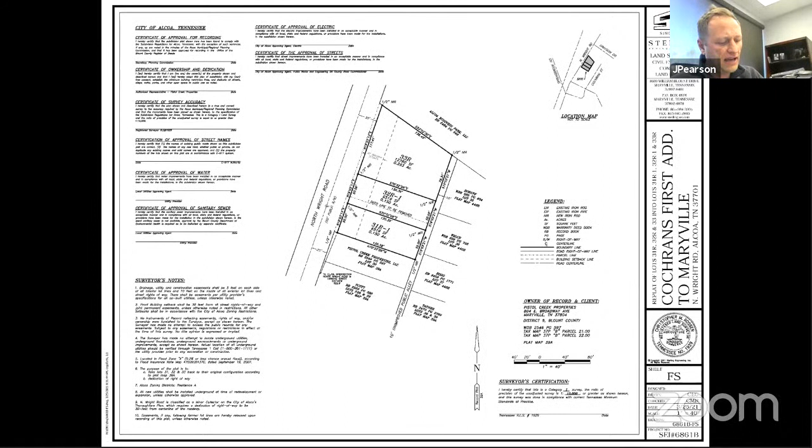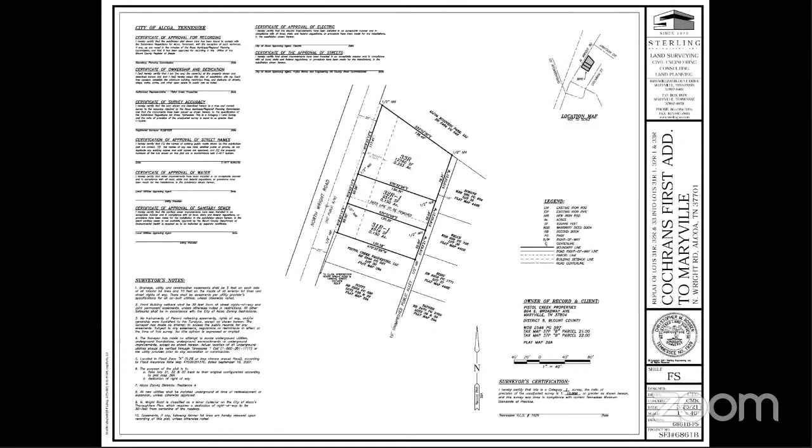So there will be an item on the agenda to allow that per a zoning change. In this case, right of way from center line is maintained as 30 feet from center line for a collector roadway facility. Staff does recommend approval of the preliminary and final plat, subject to the following stipulations: 1, a revised plat denoting stipulation A1. 2, approval by the Alcoa Board of Commissioners for the rezoning to Residence District B. 3, approval by engineering, noting this plat is still under review for utilities. 4, approval of utilities. 5, execution of the necessary signatures and recording of the plat. 6, meeting all other city requirements.

Okay, thank you. You've heard the recommendation by staff. What's the desire of the commission? I move we approve it. Second. I have a motion and a second. Is there any discussion or any comments? If not, call the roll, please. Commissioner Thompson, aye. Commissioner Johnson, aye. Commissioner Rochelle, aye. Chairman Williams, aye, thank you. Motion carries.

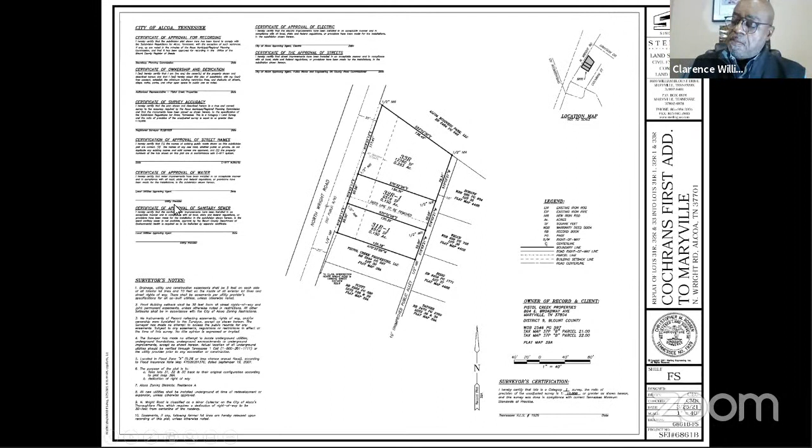Next we have a consideration of request by Benny Marmon of Benchmark Associates, Inc. to combine 2 lots into 1 lot, Topside OZ II LLC property, 2139 Topside Road, tax ID 017 031.00 and 031.01, project plat number 20-052.

There are a couple of things being denoted on this plat. First, there's a 40-foot landscape buffer that will be platted along the road frontage in conformance with a BZA approval for a special exception for a multifamily project, allowing for separation between the highway and residential dwellings. There's also a 25-foot buffer established adjoining the Hutchinson property, which is agricultural, lower density residential zoning. Since this property is zoned General Business District E, that buffer will provide for landscape plantings to lessen impacts on the adjoining property.

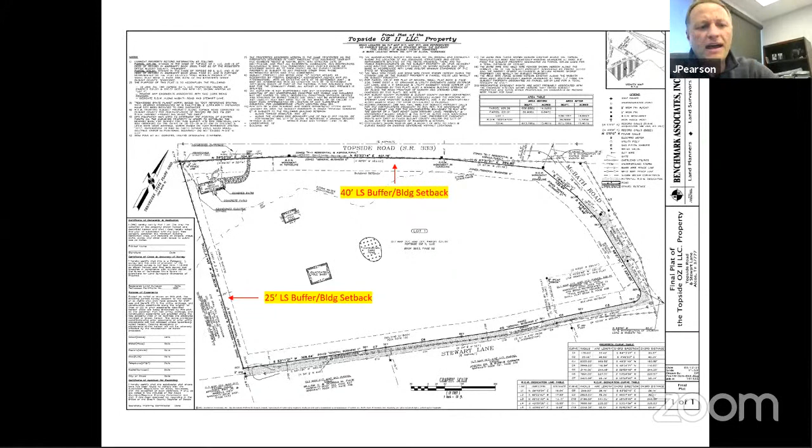Shown here is a blow-up of the buffers. One thing I want to point out on this property is there are right-of-way dedications being precipitated by this plat, and also as a result of road improvements.

McBath Road is a collector roadway facility requiring 30 feet from center line, shown here in the hatching. Stewart Lane provides for 25 feet from center line, a reduction of 5 feet from McBath Road, since it's a local street on the road plan requiring only 25 feet from center line. Topside Road is a collector, or minor arterial, requiring at its most 50 feet from center line, for a total of 100 feet. In certain instances, you can go down to 40 feet from center line.

I want to talk about that. First, in the case of the former recording in McBath, in talking with the surveyor today, Benny Mormon, who's on this meeting call as well, at the time of that recording there was a dedication of right-of-way of 30 feet from center line provided, and it was shown and recorded that way. The plat that Benny has presented does not show the 30 feet from center line that was previously platted and recorded.

One of the comments is that the previous plat and right-of-way dedication from center line be shown to indicate the 30 feet, with the intent being that we would go back at a later date and do an abandonment of 5 feet along Stewart Lane, because again, it is now a local street, whereas at the time of the previous plat it was a collector roadway, which required the 30 feet from center line.

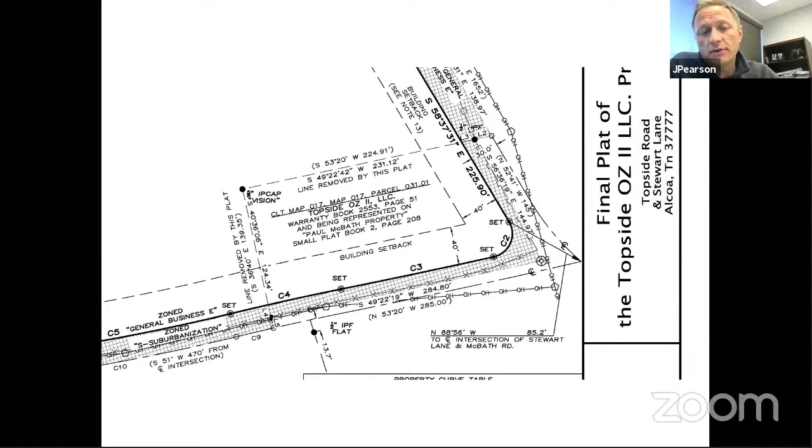The actual information shown in terms of the property calls and the location of that plat per the Paul McBath property, that's all accurate. So what I've recommended, and when I go through the stipulation of approval, is that in all areas concerning this former plat, that be reviewed further in tandem with the city attorney. It may be that a plat note needs to be added so that the previous plat is not lost in terms of what actually happened there, recognizing that there was an error and that this plat is accurately reflecting the center line measurements in the 25 feet right-of-way dedication. So I wanted to point that out.

In another matter, as I mentioned, 50 feet from center line is required for the minor arterial along Topside Road, and one of the stipulations of approval was that 50 feet be identified from center line. This is the fringe of the urban growth territory of the city, this property, and there is an ability to go down to 40 feet from center line.

The owner, Jim Doss, actually owns the property also opposite the street, and it has been requested of staff that consideration be made to reduce that 50 feet from center line to allow that which is already in existence. It is a state road right-of-way. There is 50 plus feet here on the property, and it starts to actually narrow to as little as 44 feet 6 inches at this point of the property, so you're not getting that full 50 feet.

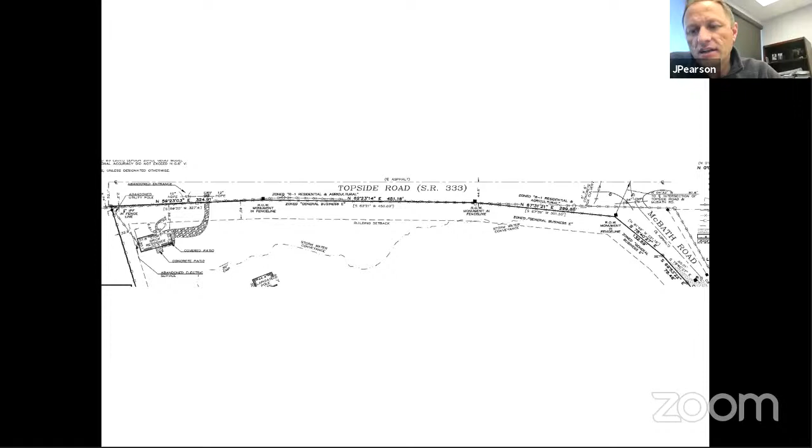If this property were near the Parkway interchange, where Weigel's, Good Times, the bank, and the Wine and Spirits are, obviously in that area the road improvements are more significant, but they do narrow as you travel the corridor. Even in the future, we would expect that to not change. So again, we feel comfortable with that.

So that's just an update from your packet on this. We went through all of this, so I will go ahead with the recommendation, as we talked more at length on it during the briefing.

Staff does recommend approval of the preliminary and final plat, subject to the following stipulations. One: a revised plat denoting stipulations A through G as revised, as you received in the revised packet. With the revision I just spoke about, I'm going to point those out as they're being written into the recommendation from the revisions that you've received also.

So the first revision would be D, item 1D, which states that Stewart Lane is classified as a residential local street on the City of Alcoa's thoroughfare plan, which requires the dedication of right-of-way to be 25 feet from center line of the roadway, with 30 feet from center line dedicated along a portion of Stewart Lane per plat book 2, page 208, McBath, Paul, the original subdivision plat. The addition here is a note that the city attorney is to review and approve language modifications to this note if necessary, which may include the need for a separate note, as the surveyor's claim is that the previous plat recording included inaccurate center line locations.

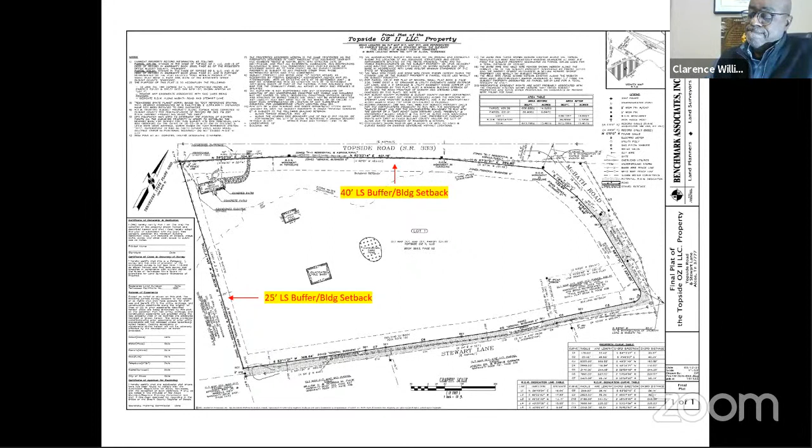Move approval as noted. Second. Okay, we have a motion and a second. Is there any discussion?

If not, call the roll, please. Commissioner Rochelle, aye. Commissioner Johnson, aye. Commissioner Thompson, aye. And Chairman Williams, aye. Thank you, motion carries.

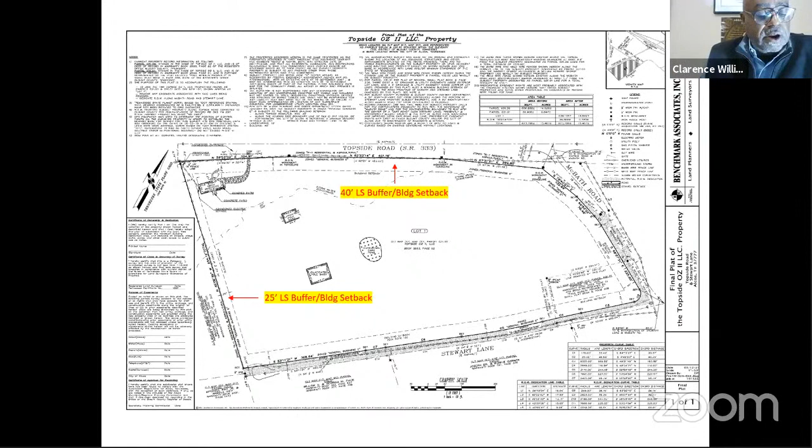Next, we have a consideration request by Kelly Harbin, D&S Builders, to plat a utility easement and site improvements, Fairfield Inn property, Springbrook Farm Development, 1865 Collins Street, tax ID 036K A006.00, project plat 19-058.

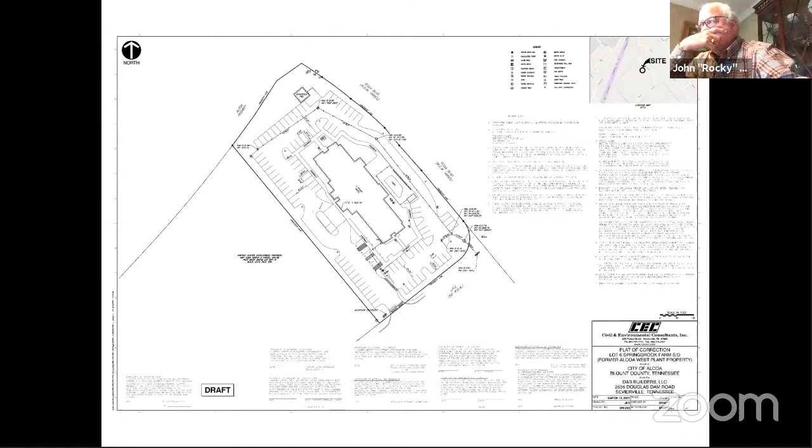Staff recommends approval of the preliminary and final plat subject to stipulations: 1, a revised plat denoting stipulations A through N as revised, provided to you previously in the packet. Revisions relating to the need for property owner information for the joint access easement, held within a separate lot for common open space and vehicular and pedestrian access, as well as N, which included that the actual lot numbers be provided on the actual plat map for that lot.

2, approval by engineering — note this is under review for utilities. 3, approval of utilities. 4, execution of the necessary signatures and recording of the plat. And 5, meeting all other city requirements.

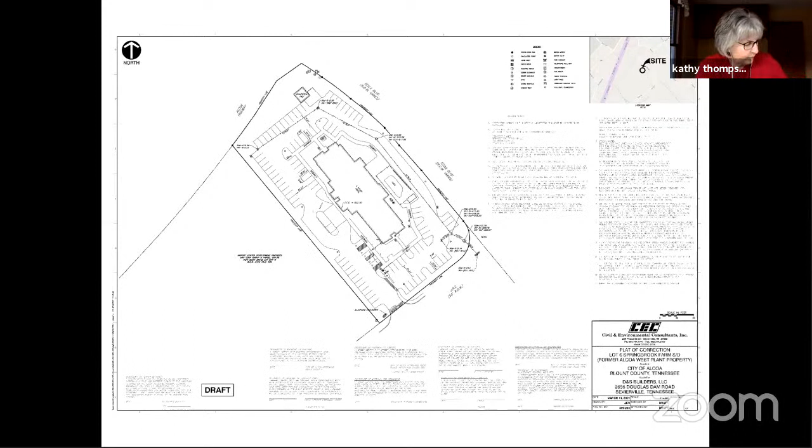Okay, thank you, sir. You've heard the recommendation by staff. What is your desire? I move we approve it. Second. We have a motion and a second. Is there any discussion? If not, call the roll, please.

Commissioner Thompson, aye. Commissioner Rochelle, aye. Commissioner Johnson, aye. And Chairman Williams, aye. Thank you.

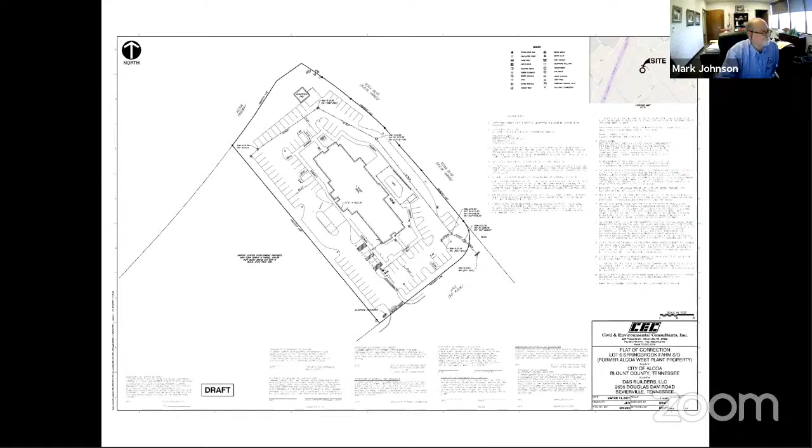Next, we have consideration of a request by Gary Best to replat the interior property line between two lots, Harold Best Estate property, 1556 and 1606 Middle Settlements Road, tax ID 045, 054.00 and 054.02, property plat 21-012.

Here's the property along Middle Settlements Road. It has frontage here, with a portion in between this land and Gary Best's property as it exists. There was also a previously platted area as part of this estate, which created Lot 1. What's happening is, as part of the estate, the portion of the property which includes the home is being split out from the larger land holding, with that larger land holding then being absorbed into Gary Best's property, as this is his family's estate.

There is a flood hazard area on the property, shown here with the hashing. There are also blue line streams on the property. All improvements are being shown. Right-of-way dedications from centerline of 50 feet, as Middle Settlements Road is a minor arterial roadway. The 50 feet is being provided from centerline at Gary Best's property, and needs to also be reflected on the property identified as Lot 2. As the previous estate split to carve out this lot created Lot 1, Lots 2 and 3 are being created as they were part of the original Harold Best estate.

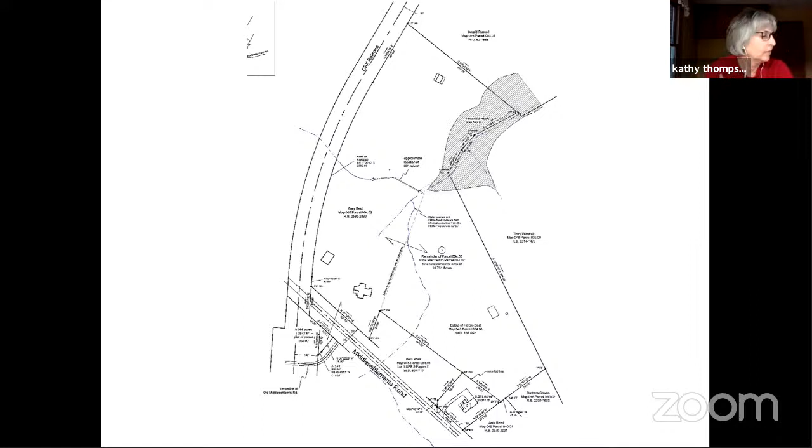Okay, thank you. We've heard the recommendation of staff. What's the desire of the commission? I move that we approve this. Second. We have a motion and a second. Is there any discussion or comments? If not, call the roll, please.

Commissioner Thompson, aye. Commissioner Johnson, aye. Commissioner Rochelle, aye. And Chairman Williams, aye. Thank you. Motion carries.

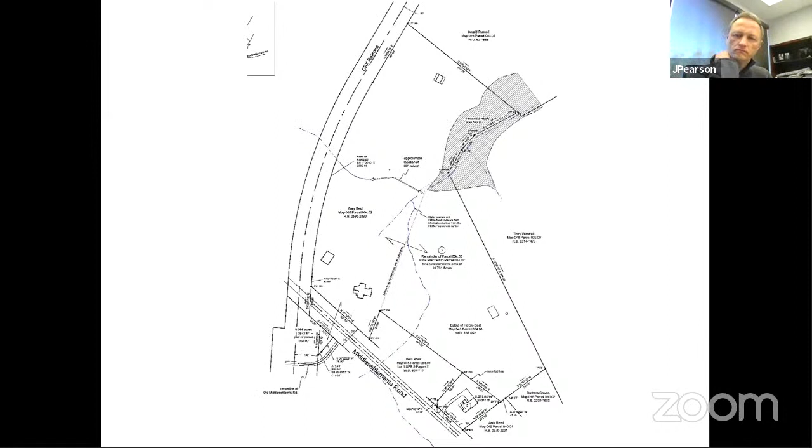Next, we have a consideration request by Randall White Land Surveys to replat 3 lots into 1 lot, Trevor Hill Properties, Fox Hill Drive, Two Rivers Lane, Urban Growth Boundary, tax ID 0020, A 006.00-009.00, project plat 21-013.

As you can see here, the plat is in the urban growth territory of the city, creating this lot, which is Lot 10 — a land area absorbing 2 additional tracts. There are also some easements that are being abandoned.

Staff recommends approval. You were provided the recommendation in your packet, and no changes were made to that. Staff recommends approval of this preliminary and final plat, which is again within the growth territory of the city and located off Fox Hills. Stipulations: 1, a revised plat denoting stipulations A through E; 2, approval by engineering if applicable; 3, approval of utilities; 4, approval by Blount County Environmental Health; 5, approval by Blount County Highway Superintendent; 6, execution of the necessary signatures and recording of the plat; and 7, meeting all other city requirements. Move approval as noted.

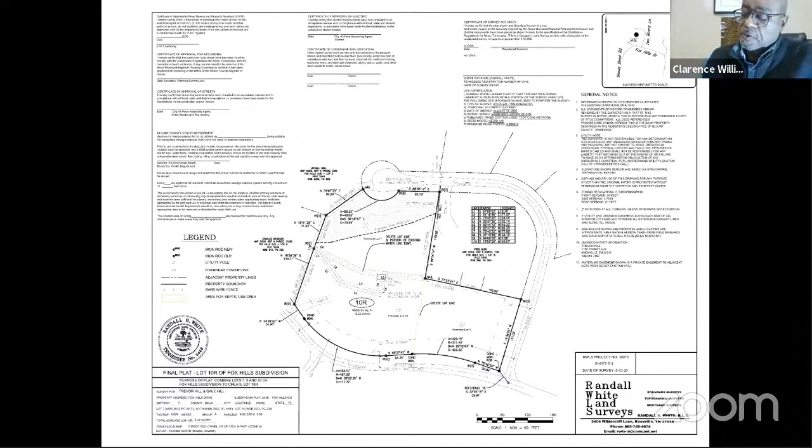We have a motion and a second. Is there any discussion? If not, call the roll, please. Commissioner Rochelle, aye. Commissioner Johnson, aye.

Commissioner Thompson, aye. Chairman Williams, aye. Thank you. Next, we have a consideration request by Ruskin Baskin Land Development Solutions to replat the interior property line between 2 lots, Young Properties, 516 and 518 Russell Road, Urban Growth Boundary, Tax ID 027B A of 010.01 through 011.01, Project Plat 21-014.

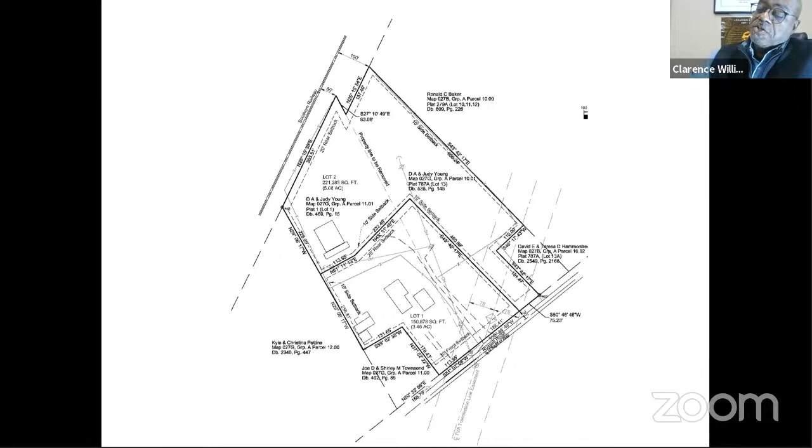Okay, thank you. You've heard the discussion and recommendation by staff. What is the desire of the commission? Move for approval. Second it. We have a motion and a second. Is there any discussion or comments? If not, call the roll, please.

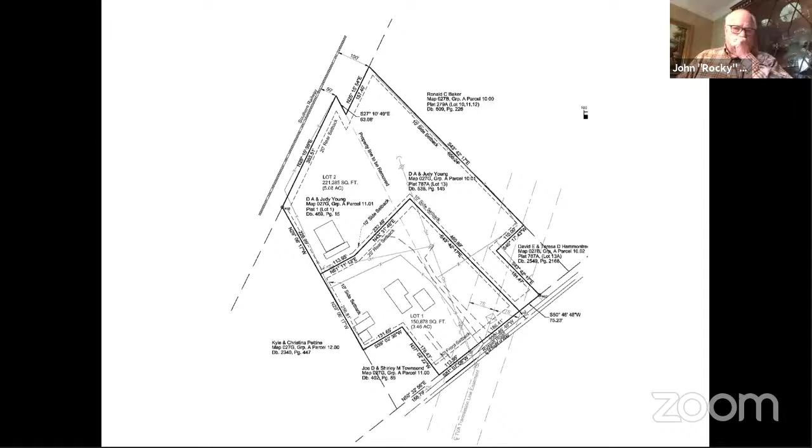Whitaker Properties LLC and Outlander Group LLC properties, 3234 and 3262 Airport Highway, Tax ID 017 084.01 and 084.02, Project Plat 21-015.

This property, along Alcoa Highway with road frontage, also adjoins the Sherwood Garden Cemetery and the North Park area to the north, adjoining the lands.

This represents a split of what I'll refer to as the former Enterprise Building, currently platted as a narrow lot with a property pin here. You can see from the northern corner, south along the highway to this point, it continues to another pin as it closes at its rear point, and back to another pin to close it at the north corner.

So you can see it's limited in its developability. It has limited parking. What this does is give them additional land area to better use this site for a general business district lot that would allow for more storage and such.

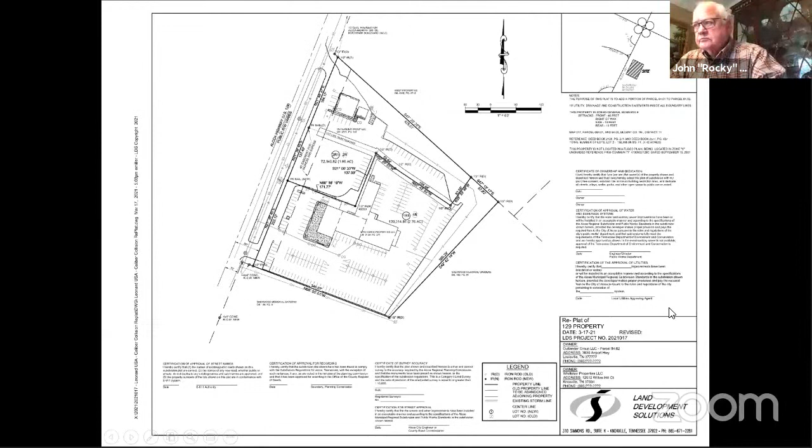On your agenda, under this particular category, request for preliminary and final approval, you show there are 8 items listed. That 8th item we're going to move down to the next category, request for preliminary approval. So there were only 7 items discussed under the previous category. The 8th item will be moved, and that item becomes number 1 under Roman numeral 6.

It is a consideration request by Randa White, C2RL Engineering, to replat 15 lots into 3 lots, replat a portion of Airline Drive to include absorbing a to-be-abandoned area of Airline Drive right-of-way. Honda Land LLC and Loan Properties, Airline Drive and Airport Highway, tax ID 017LB 001.00, 004.00, 005.00, 006.00, 009.00, and 013.00 through 015.00, tax ID 017 078.00, and tax ID 017 078.02, project plat 21-016.

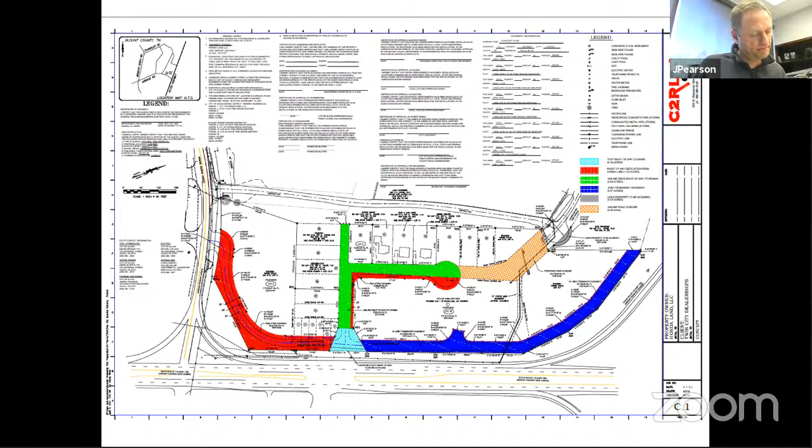Commissioner Rochelle, aye. Commissioner Thompson, aye. Commissioner Johnson, aye. Chairman Williams, aye. Thank you. This item for preliminary approval, the first item in this category, is approved by this body.

Thank you. Next, we have a request for final approval. We have no items in that category. Next, we have Roman numeral 8.

The first item of that category is a miscellaneous request for required action. The first item there is consideration of a rezoning request, Residence District A to Residence District B, for tax ID 037P, B021-00, 022.00, 022.01, 026.00, 026.01, and 026.02, located at 512, 518, 524, 556, 560, and 568 North Wright Road.

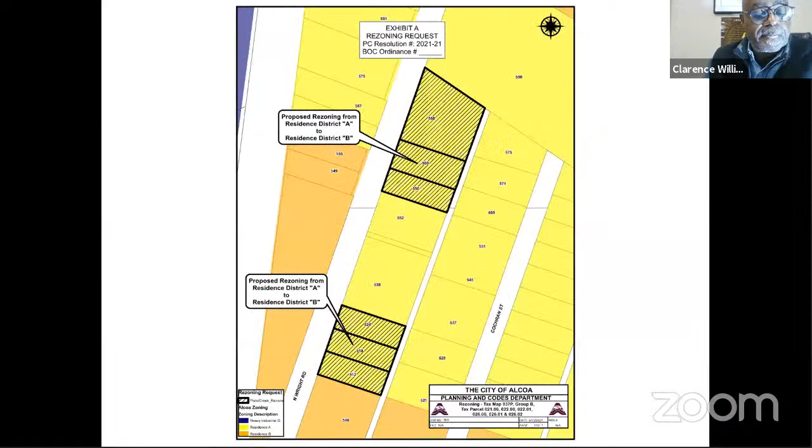Okay, you should see the map before you. You see the hashing. There are 3 parcels on the north end, and on the south end, there are another set of 3 parcels, all held by Pistol Creek Properties.

Again, the 3 northern parcels are part of the plat that was looked at previously and approved. This is just to align the form with the zoning. It's obviously more of a medium density form in this area. The long range plan for the area calls for medium density, and this would be in conformance with that.

So the Residence District B zoning classification is recommended to you, and staff has provided a PC resolution in your packet, PC Resolution 2021-21, which recommends the rezoning to the Alcoa Board of Commissioners, including the approval and recording of a subdivision plat to adjust the lot lines for conformance with the Residence District B zone. So that plat will be held until the zoning is effective, and then it will be recorded.

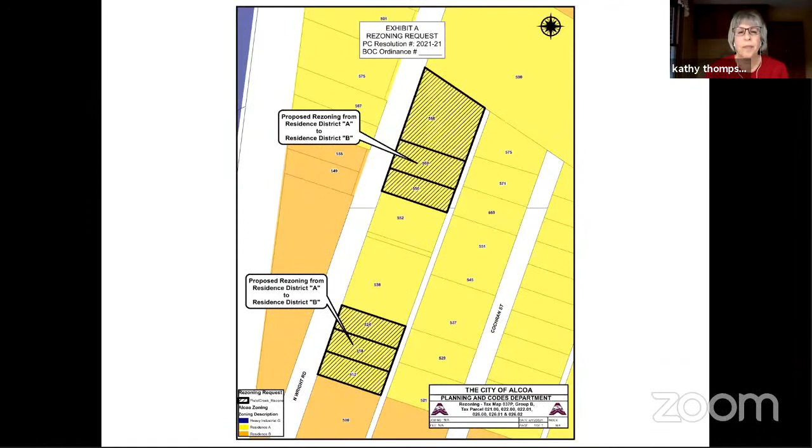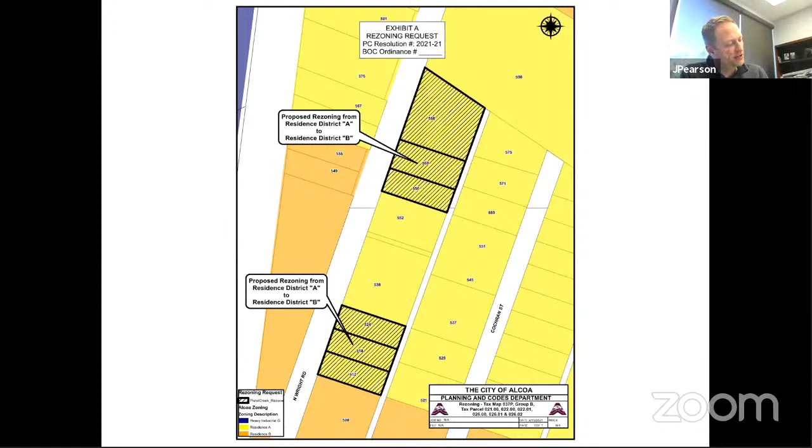Okay, thank you. You've heard the recommendation by the staff. What is the commission's desire? I move we approve it. Second. I have a motion and a second. Is there any discussion? If not, call the roll, please. Commissioner Thompson, aye. Commissioner Johnson, aye. Commissioner Rochelle, aye. Chairman Williams, aye. Thank you. PC Resolution 2021-21 is approved by this body.

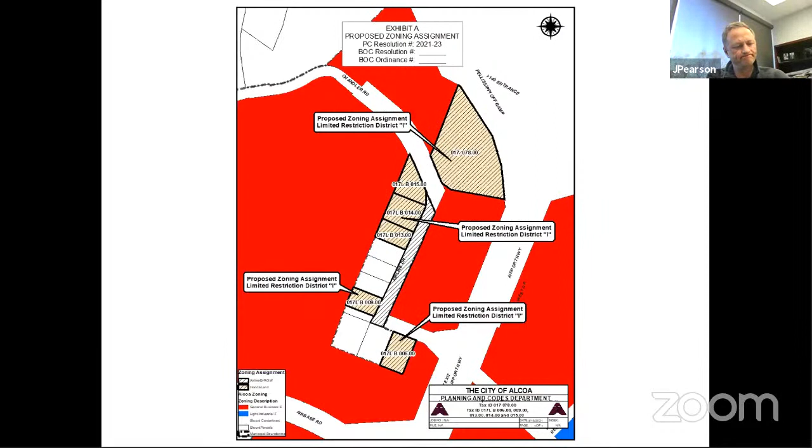Okay, thank you. Okay, you've heard the recommendation of the staff. What is the desire of the commission? And so moved. I'm gonna second that. Okay, we have a motion and a second. Is there any discussion or comments? If not, call the roll, please. Commissioner Johnson, aye. Commissioner Rochelle, aye. Commissioner Thompson, aye. Chairman Williams, aye. Thank you. PC Resolution 2021-23 is approved of this body.

Next, number 4, we have a consideration request to abandon a portion of Airline Drive as a public right-of-way.

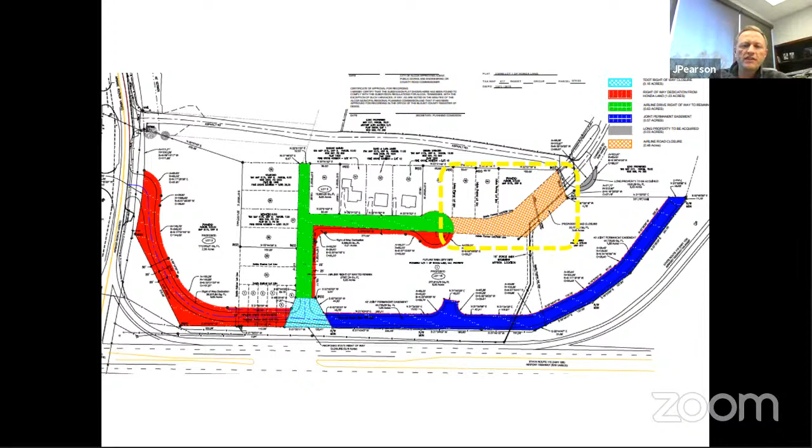Okay, here, which also serves as the plat map, you see in the dashed yellow on the drawing the area of abandonment in the orange shaded hatch. This follows along with the previous items, and we've provided in your packet PC Resolution 2021-24.

Which recommends the right-of-way abandonment to the Alcoa Board of Commissioners. There's also supplemental documentation provided, including the annexation of surrounding territories and a conceptual layout, not being considered at this time. In the future, development plans will proceed and you'll look at this again, but this gives context on what consolidations and road rights of way can achieve for this landholder, Twin City dealerships, to provide an additional dealership, along with road improvements for access and building and parking changes in this area.

So staff recommends that the resolution be adopted. Okay, thank you. You've heard the recommendation of staff. What is the desire of the commission?

I move for approval. Second. We have a motion and a second. Is there any discussion, any comments? If not, call the roll, please.

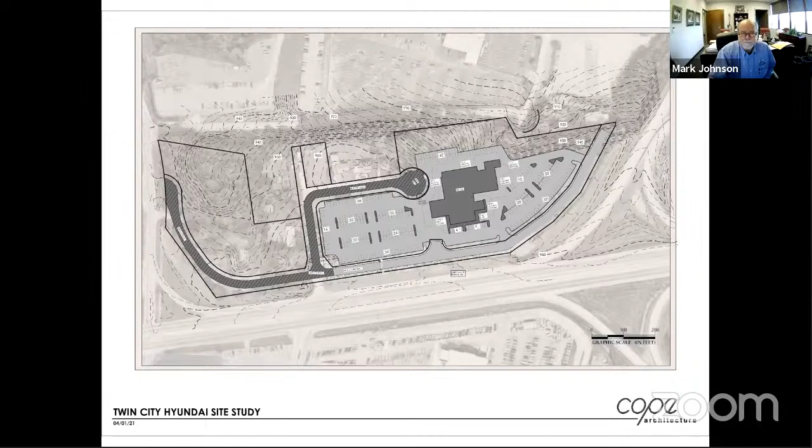Commissioner Thompson, Aye. Commissioner Johnson, Aye. Commissioner Rochelle, Aye. Chairman Williams, Aye. Thank you, PC Resolution 2021-24 is approved by this body.

This property is far removed from city limits, not contiguous or easily attachable, and the request was for sanitary sewer service, which is not feasible per staff study. There's a PC Resolution in your packet, PC Resolution 2021-25, recommending that the parcel not be annexed, due to the request being infeasible and therefore premature at this time, which would allow them to get to the sewer.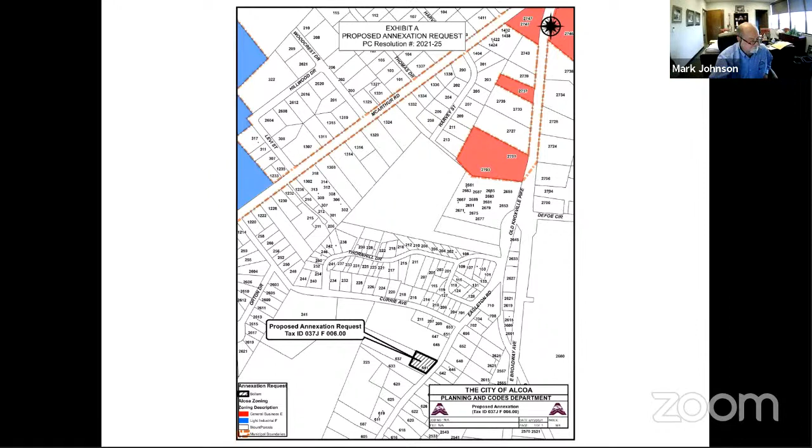As per... I'm sorry, was that you, Rocky? Go ahead. I was going to make the motion, as per staff recommendation, that this property not be annexed at this time. Second. We have a motion and a second. Is there any discussion or any comments?

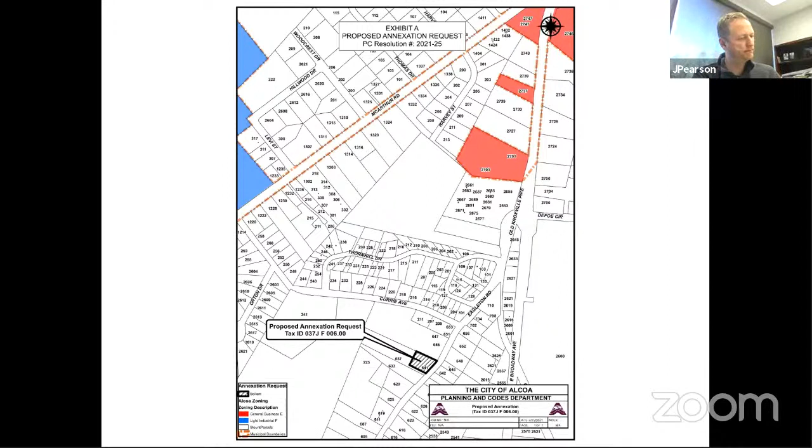If not, call the roll, please. Commissioner Rochelle, Aye. Commissioner Johnson, Aye. Commissioner Thompson, Aye. Chairman Williams, Aye. Thank you, PC Resolution 2021-25 is approved by this body.

Next, we have Roman numeral 9, concept plan review. The first item is consideration of a concept plan for the Vose School redevelopment, Reagan Investment, located on Birch and Cedar Street, tax ID 036EH026.00, project development 15-009.

You should see the screen before you. This represents the overall existing layout of the Vose School and the parking to support that facility, which is in the Vose neighborhood bound by Birch Street, Cedar Street, and Locust Street. It's 1.33 acres, a larger property.

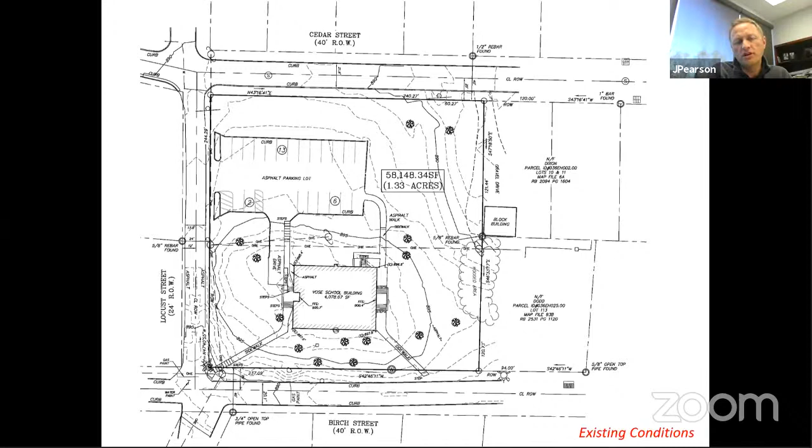As you recall, a number of months ago the city went through a request for proposal process, and there was a review by a design team and it was presented to the Board of Commissioners. Reagan Design was chosen to develop and put this property into reuse, with a proposal for residential use at the Vose School for 4 separate apartment units within the school. What they have before you now is their conceptual proposal to get your review and approval as they proceed into more detailed site planning for the development plan and a subdivision plat.

The proposal includes 4 lots, lot 4 being the school, which would include relocation of the parking lot, accessed off of Birch Street, maintained at 25 feet in width for the drive aisle, with parking supported at 2 spaces per unit for the 4 units. The concept also includes an additional 3 single-family detached housing sites along Cedar Street.

This is in keeping with the Cedar Street development plan of single-family detached housing. It also includes common open space maintained on lot 4, addressing stormwater management and overall open space requirements, which would precipitate a need for joint maintenance and restrictive covenants for this type of subdivision. The lots would be maintained at 6,000 square feet each, with more than 50 feet minimum road frontage. This is a Residence District B zoning classification, which allows medium density multifamily projects and single-family detached housing, so the zoning would support this type of configuration.

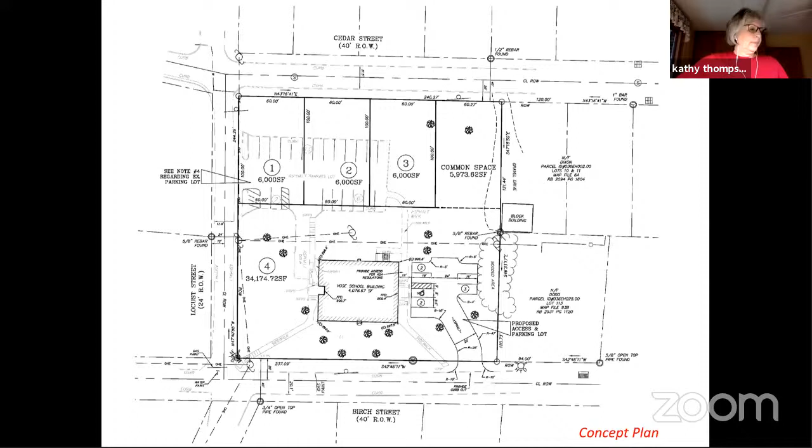Okay, thank you. We've heard the recommendation of staff. What is the desire of the commission? I move for approval as noted. We have a motion on the floor. I'll second that motion. We have a motion and a second. Is there any discussion or questions? If not, call the roll, please.

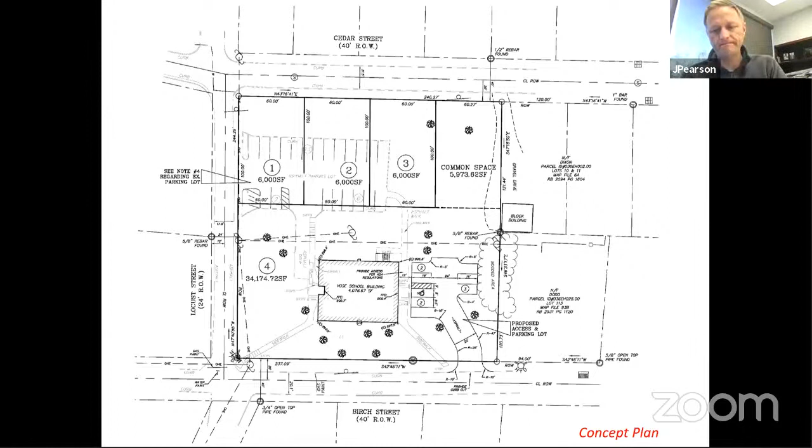Commissioner Thompson, Aye. Chairman Williams, Aye. Commissioner Johnson, Aye. Commissioner Rochelle, Aye. Thank you, motion carries.

Next category is Roman numeral 10, old business, and we have none. Roman numeral 11 is new business. We have a consideration of request by Ryan Dobbs, Barbara McMurray Architects, for site plan approval for a change of use, East Tennessee Children's Hospital Urgent Care, former Playhouse Restaurant, located at 352 Fountain View Circle, tax ID 046C A 016.00, project development 20-017.

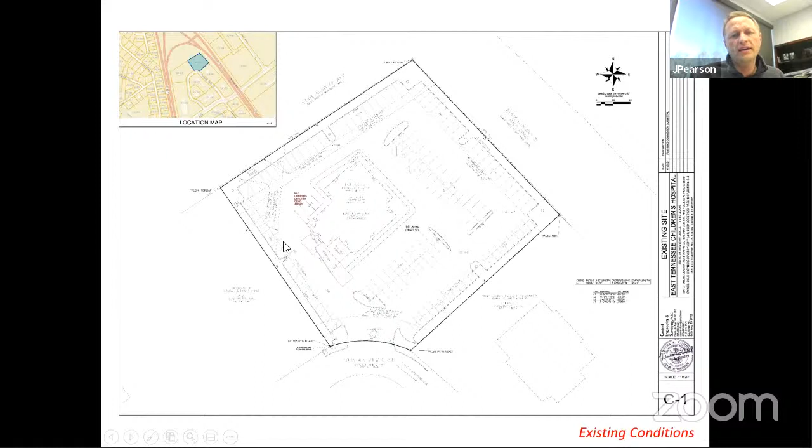Okay, so this, as you mentioned, is the former Playhouse building, also contained within the Springbrook Corporate Center and adjacent to the Texas Roadhouse and bound by state highway rights of way. The use change here is from restaurant to office. The change to this site represents expansion of the building, shown in red now. There will also be improvements to the elevations, which do not really include a change in terms of form. In terms of materials, it will be in keeping with that which exists, so really just giving this a fresh look with some minor modifications.

You are provided with the recommendation, again for an urgent care facility for Children's Hospital. Staff does recommend site plan approval, including the exterior building design, subject to the following: 1, a revised site plan denoting stipulations A, B, and C, with C being the addition of a bike rack location with the bike rack detail to be provided. 2, approval of utilities if applicable, with all utilities to be underground. Note that all building signage and other site fixtures or accent lighting, including pole lighting applications, shall be designed and installed to project the light downward. 3, approval of landscaping plan by the Alcoa Tree Board, if applicable.

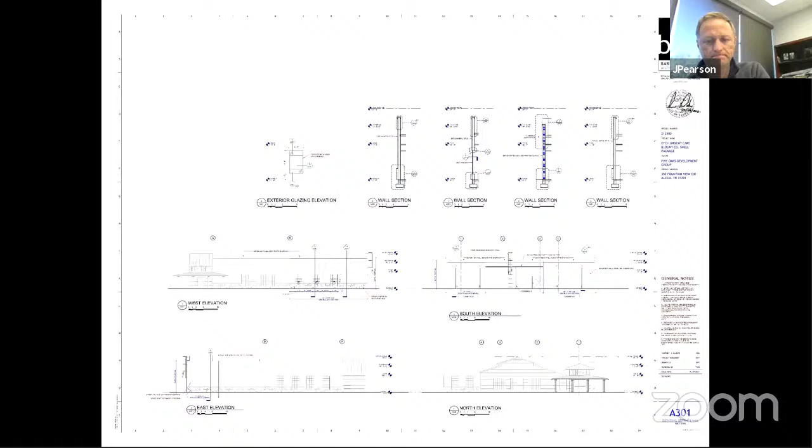And 4, meeting all city requirements, which include building plans review, approval, and issuance of the necessary permits, etc. Move approval as noted. Second. Motion and a second. Is there any discussion or comments? If not, call the roll, please. Commissioner Rochelle? Aye. Commissioner Thompson? Aye. Commissioner Johnson? Aye. Chairman Williams?

Aye, thank you. Next, we have a consideration request by Kelly Hicks, Johnson's Architectural, for site plan approval for an extended pavilion, Clayton Lodge, located at 150 Clayton Lodge Road, tax ID 027 028.03, project development 20-018.

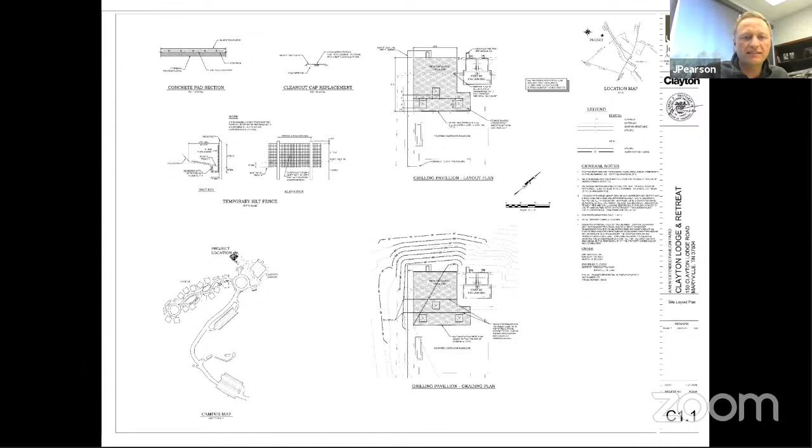Okay, this again represents an improvement project on the Clayton Lodge property, and as you recall there have been a number of improvement plans presented over the years. Specifically, this plan was also presented to you previously. There was site plan approval at the February 20th, 2020 meeting for the new grilling pavilion. This request eliminates the golf cart shed that was reviewed previously and extends the existing pavilion out, which is 37.8 feet in length and 29.9 feet in width, and expands the slabs for existing trees as well. This represents the area of the property, which includes this grilling pavilion and all improvements that'll be included as part of this project.

And site plan building elevations were provided to you as well. It is a PUD type of development plan, all in keeping with that which is planned for and developed currently. Staff does recommend the revised site plan approval as it was considered previously, subject to the following: 1, approval of engineering, 2, approval of stormwater management if applicable, 3, approval of utilities with all utilities to be underground, and 4, meeting all city requirements.

Thank you. You heard the recommendation of staff. What is the commission's desire?

Move approval. Second it. We have a motion and a second. Is there any discussion or any comments? If not, call the roll, please.

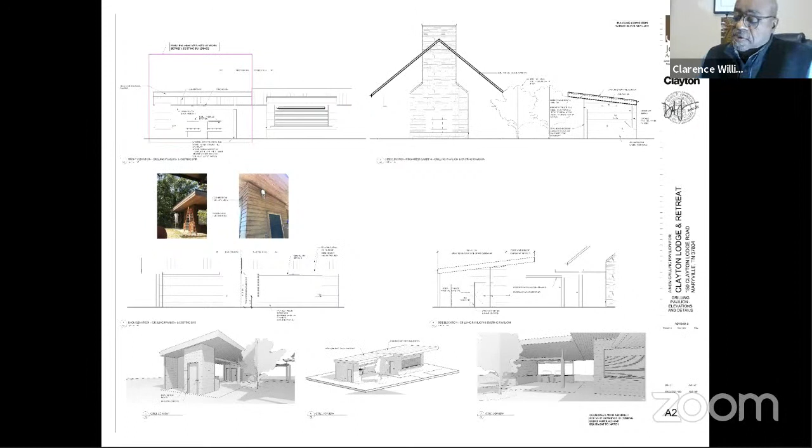Commissioner Rochelle? Aye. Commissioner Thompson? Aye. Commissioner Johnson? Aye. Chairman Williams? Aye. Thank you.

The next category we have is item Roman numeral 12, other business. This is for information on the request by Blount County Library and Logan Hill for the installation of picnic table style Wi-Fi hotspots on public lands at the Martin Luther King Jr. Community Center and Springbrook Park.